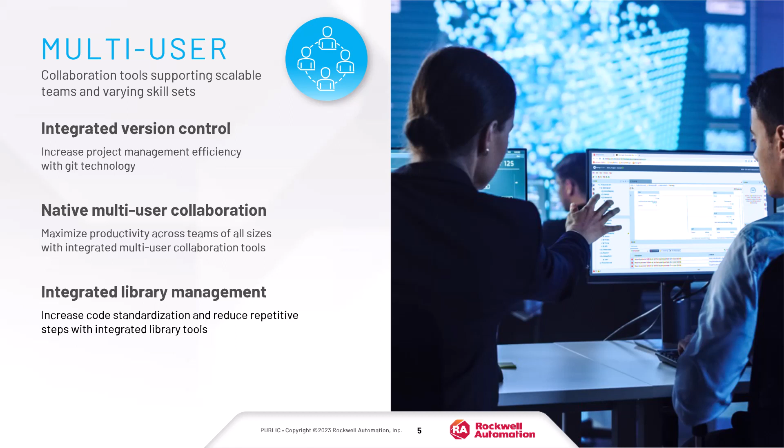With a system-focused approach, FactoryTalk Design Studio enables multiple controller management in a single project. Programs can be allocated individually to a controller based on the execution requirement of the project. This feature improves logical project organization and deployment. Rather than having to match the software version with a controller, FactoryTalk Design Studio can support multiple controller revisions and will inform the user when trying to allocate if the code is not supported by the firmware revision. This way we can use a single software across many hardware revisions.

Another benefit of FactoryTalk Design Studio, being a cloud-hosted SaaS offering, is the ability to provide updates automatically. FactoryTalk Design Studio has updates delivering new features quarterly. Since FactoryTalk Design Studio was released in October of 2022, there have been several updates. These updates include new features like adding FactoryTalk Vault integration, device management, and configuration enhancements, and enhancements made to the version control system.

For those who are familiar with Rockwell Automation's other design software, you may be asking where FactoryTalk Design Studio fits into that ecosystem. Rockwell Automation provides our users with an on-premises offering with Studio 5000 Logix Designer. For our Logix Designer users interested in moving to the cloud, we have FactoryTalk Twin Studio, which is cloud-hosted. FactoryTalk Design Studio is a cloud-native design application for users looking to adopt a cloud-native solution for their automation development.

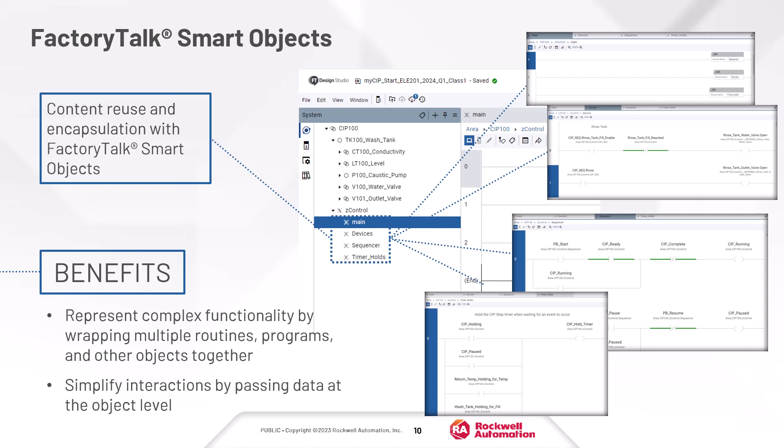To contrast, if you think about the reusability that's available in Logix Designer, now you're probably thinking about subroutines or add-on instructions or AOIs. Subroutines and AOIs also allow encapsulation, abstraction, and reusability, but you only have a single routine associated with those objects. Smart Objects expands on that idea and allows you to create larger encapsulated groups of code.

FactoryTalk Design Studio also allows for tags to be scoped at the routine level. So to summarize, Smart Objects allow modular, object-oriented programming to be used as your logical project design dictates.

Next, let's look at how FactoryTalk Design Studio is based on a logical, hardware-abstracted design methodology. We want you to be able to design your project based on what that system is doing and not be focused on where it is executing. We think there's a lot of value to designing your project logically. You will be able to deliver a project that is very easy to understand.

By looking at the system model, you are looking at what the system is doing and are able to troubleshoot the system that way. In addition to that, you can also build your project based off of what it's doing and worry about how it is executed later.

If you have created a Logix project before, then you have seen that you need to start by defining what controller you're working with. We have changed that workflow in FactoryTalk Design Studio. You are able to map out the system operation, create your logic, then add your controllers and hardware later. You will bind the logical content to the execution devices using a process called allocation. Let's step through that process of creating and allocating code.

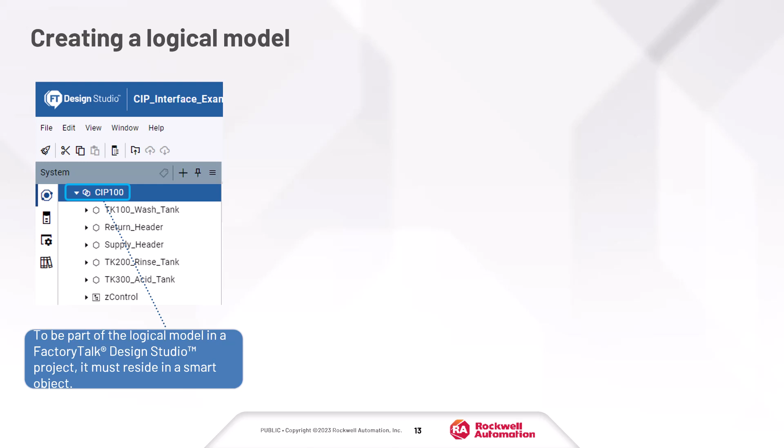We start in the system view where we create our smart objects. These smart objects represent the logical operation of the system. Our project is a clean-in-place system. CIP 100 represents our clean-in-place system, which has child smart objects. These child smart objects are for the wash, rinse, and acid tanks. CIP 100 is the highest level of our system.

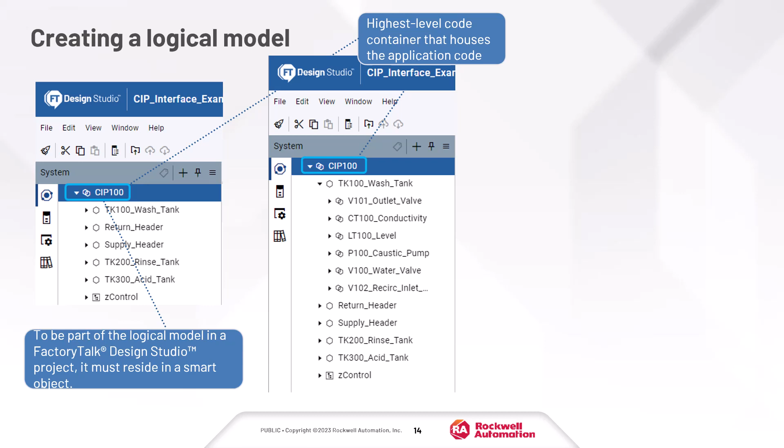If we expand out this smart object, we see the child smart object of TK 100 wash tank. This smart object has more child smart objects. The logical organization is what is important here. Imagine if we have an issue with the V101 outlet valve in the TK100 wash tank. We keep looking through the logical hierarchy until we get to the routine for the V101 outlet valve. The smart object allows for parent-child relationships in the logical model.

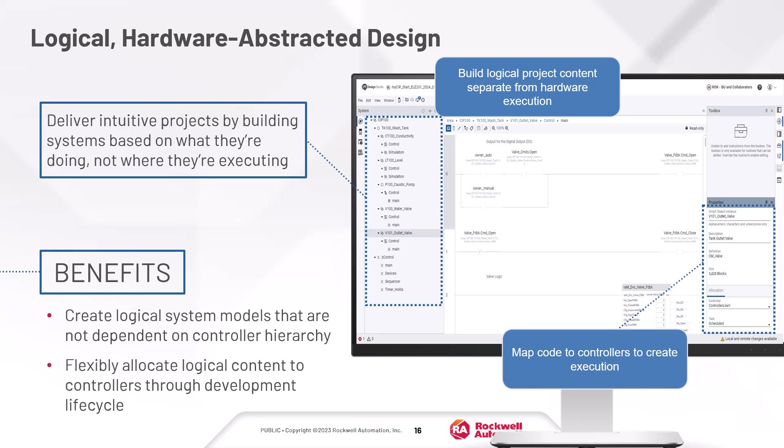The next topic I want to talk about is integrated libraries. When you think about object-oriented programming, you often need the ability to manage those objects in a library. That's what the idea of having an integrated library means. You don't need to go to a separate product to manage these definitions or instantiate them into your project. What you can do is create those definitions directly in the FactoryTalk Design Studio library.

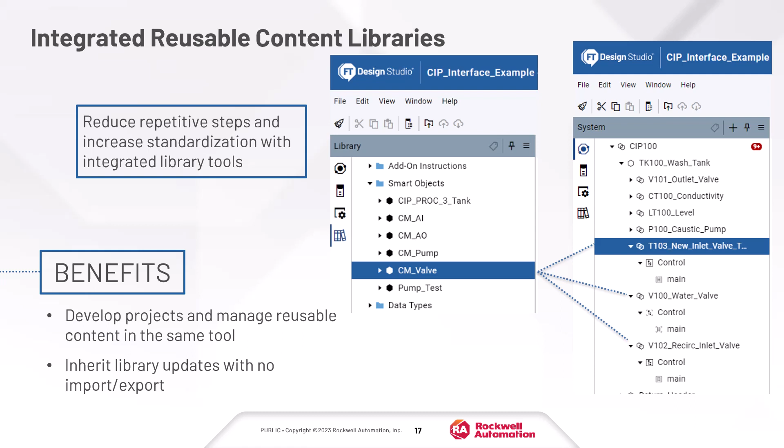You can see from the screenshots here that we still have AOIs and UDTs. Those are still available from the library, but the smart objects can now also be managed from the library. We will see how to instantiate smart objects in a few slides. But first, let's look at one other topic, how we share data between objects.

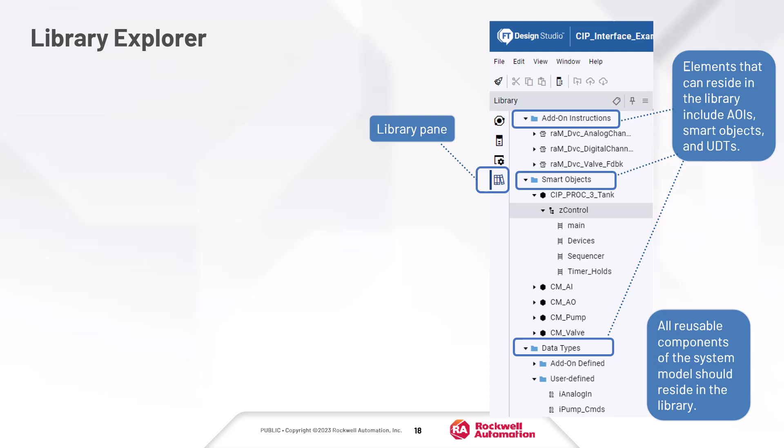Once again, when looking at object-oriented programming techniques, some key pillars are encapsulation and abstraction. To encapsulate and abstract your content in an object, you must provide a mechanism to share data outside of an object and also hide data inside the object. How this is done in FactoryTalk Design Studio is using parameters and local tags. Tags can be defined at both the controller and program level, but those defined at the program level can be designated as either local or shared.

Local tags are not visible outside of the program, where shared tags can be set as input, output, or in-out, which allows for connections to the smart object from external sources. These connections can be set in the property pane.

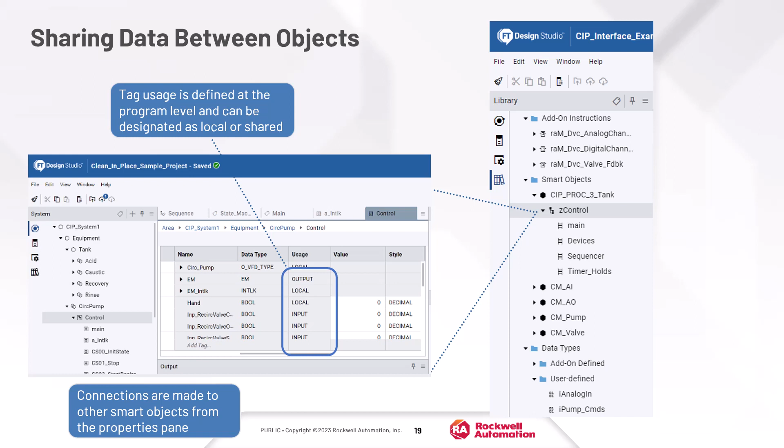Now that we have smart objects in our library, we need to be able to use them in our project. It's quite easy to instantiate a smart object into your project. In the system view, as seen on the left side of the slide, the user creates a new smart object. The Smart Object dialog box appears, and after the name is entered, the user can select Create an Instance from

a definition. Once the definition is selected and the smart object created, it will be placed in the project in the system view. Notice how the smart object icon is two linked hexagons to indicate it is linked to a smart object in the library.

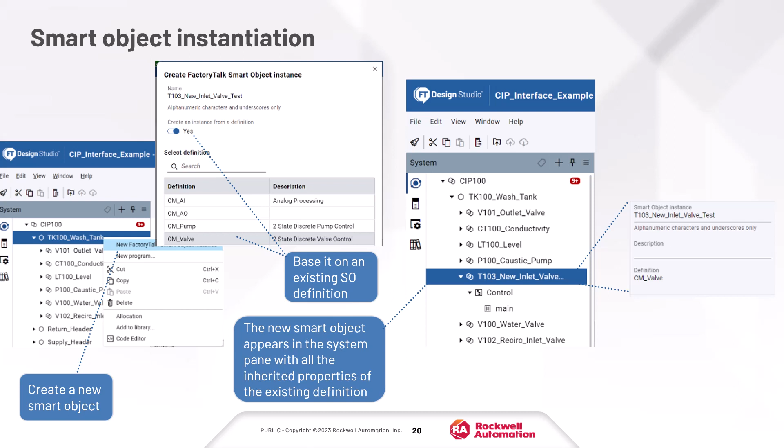This is a good time to take a quick look at instantiated versus singleton smart objects. A singleton smart object is a standalone object that acts as a hierarchical container in the system view. A singleton is identified by the icon of an outline of a hexagon. When a smart object is defined in the library, it is shown as an icon with a filled-in hexagon. When a smart object is inherited from a library object, the smart object's icon is two linked hexagons.

I know you may be saying, do I really need to know this much detail? The next slides will answer that question.

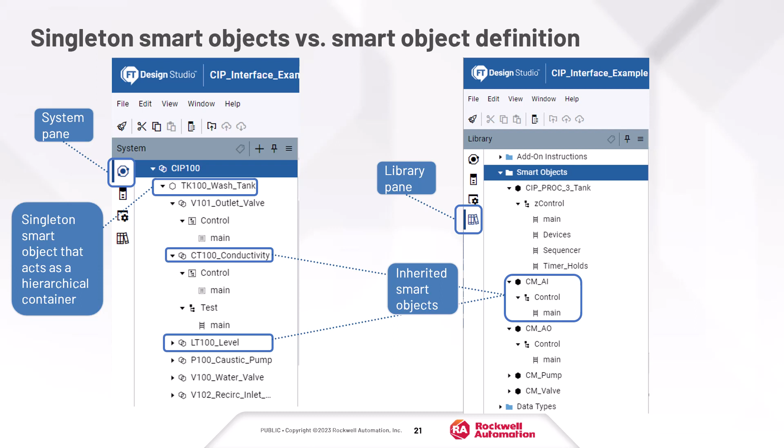Another key aspect of object-oriented programming is inheritance. All this talk about instantiating and inheriting smart objects is necessary to implement inheritance in FactoryTalk Design Studio. An important part of inheritance is being able to break inheritance. Imagine in your project you have an object which is inherited from a library. In this example, we have a valve object.

Let's imagine that we need to make a change to that instantiated smart object, but we don't want to change the definition. That would change all the objects using that library module. Instead, we break inheritance. In this case, we right-click on the object and choose Override Program. This allows us to change the specific program without affecting the library definition.

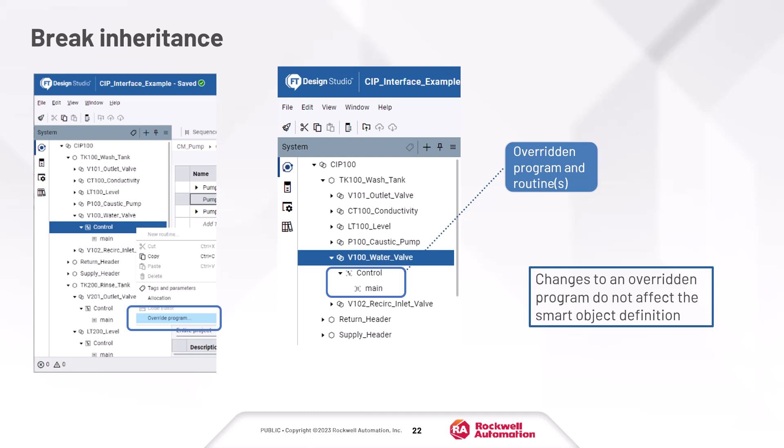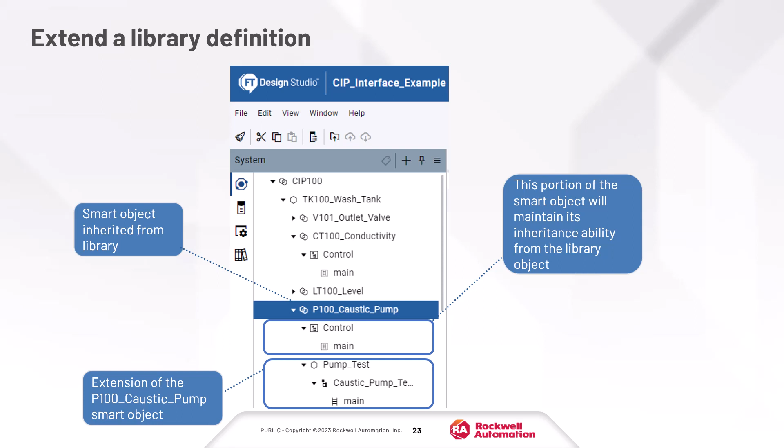Another important aspect of inheritance is combining objects together to create new objects. You might want to combine multiple objects together or add content to a current object. In this case, the original library object does not change. This process is called extending an object, and that is also supported in FactoryTalk Design Studio. In this example, the pump object is used from the library, but the pump test smart object is added to the caustic pump smart object.

Now imagine we take the code we just created and we want to create a library object from that. Guess what? We can. If we right-click on the smart object and select Add to Library, we can add this new code back into the library. Better yet, we still have the original definition as part of our new smart object, so if changes are made to the library, those changes will be inherited in the new object. That is object-oriented programming at work.

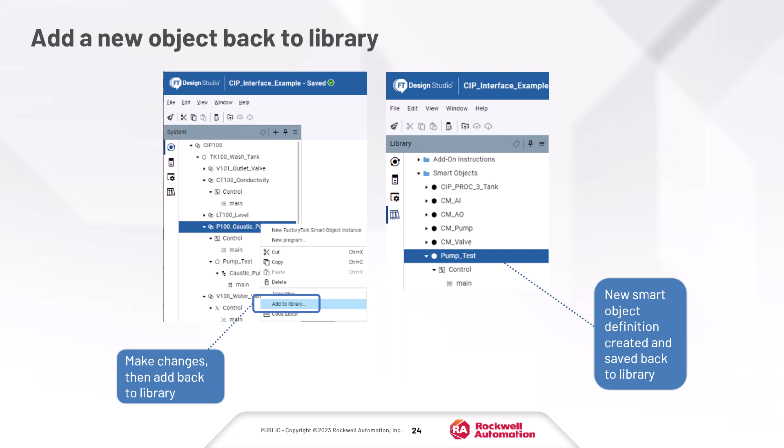We have gone over a lot of items here, so let's take a moment to recap all we have learned. Smart objects are setting the foundation for the modern software experience in FactoryTalk Design Studio. They provide the basis for a modular, scalable design environment. They can be standalone or inherited from the library. They expand on the idea of the AOI but can encapsulate other smart objects as well as multiple programs and routines. Smart objects allow you to create a logical hierarchy that's easily understandable.

They can be created in the integrated library so they are easily transported and instantiated. They can be extended to account for differences in the project design. They can interact with other smart objects by passing data in and out through a program parameter connection. They continue to be expanded on through future iterations of the product. Finally, the integrated library currently supports one project but will be expanded in future updates to be shared among many FTDS projects, users, and organizations.

As we mentioned earlier, many programmers working on automation are more comfortable with text-based programming. FactoryTalk Design Studio allows those users who are familiar with text-based programming to easily transition to automation programming, which has been traditionally done with graphical editors. And for those who prefer the graphical displays, those are still the default. When making changes in the code editor, the text is automatically rendered in the graphical display. This feature provides the flexibility for each developer to choose what programming method is best for them.

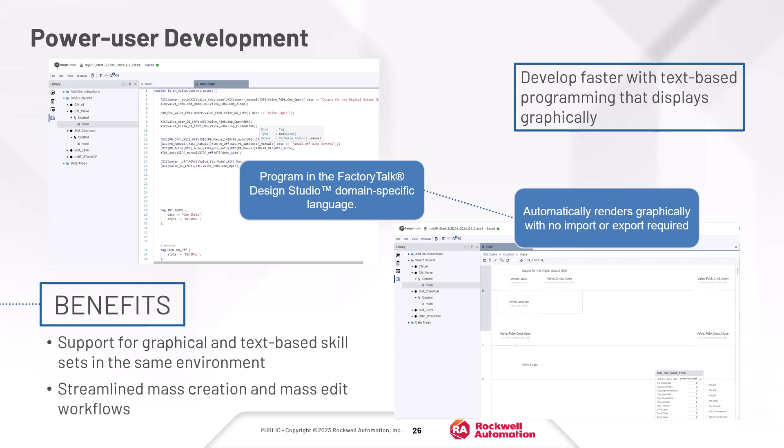As mentioned earlier, Integrated Version Control System allows native multi-user collaboration, allowing the user to easily share code while maintaining code synchronization.

If you're not familiar with the idea of a commit, it is a milestone in your project. It is a known good state. The commit allows an increment in the change history to see who's making changes and what they're doing to the project. It also allows detailed comparisons.

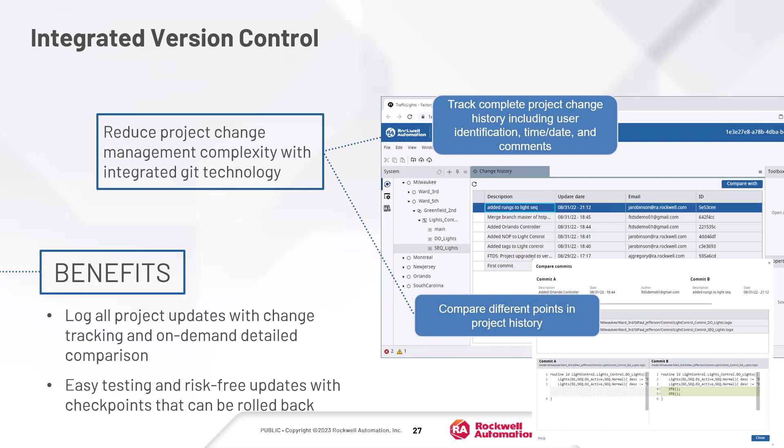You can see in the lower right the comparisons of one point in history to another point in history. I can take my latest changes and compare them to several changes ago. Maybe that's part of a troubleshooting effort, or maybe I'm just looking to make sure that I understand the changes that have occurred at a certain point in time. Currently, the comparison is in the text editor, but in future releases a graphical compare will also be available.

To look a little closer at the change comparison, highlighted content calls out a change in the line of code. Gray slashes indicate nothing was in the project before and now there is something in the new version. Any highlighted line indicates something has changed.

Going hand in hand with version control is the topic of multi-user collaboration. This integrated version control system enables native multi-user collaboration, allowing the user to easily share code while maintaining code synchronization. As we just covered, FactoryTalk Design Studio also includes integrated project tracking, allowing users to see all local and remote changes by other members of the team. You can merge your local edits with the shared project and merge changes made by other users. This feature provides design flexibility and improved collaboration while developing applications.

For those who are familiar with Git, the ability to have multiple users collaborating on a single project is not new, but we recognize Git is oftentimes a new concept for automation users. So we are trying to make it simple for those users. We have added icons highlighted at the top, where with a single click you can merge, push, and pull changes, or bring up the current change history. In the bottom right-hand side of the screen, a statement of the status changes is displayed. This indication helps the user to understand what project changes are available in the system.

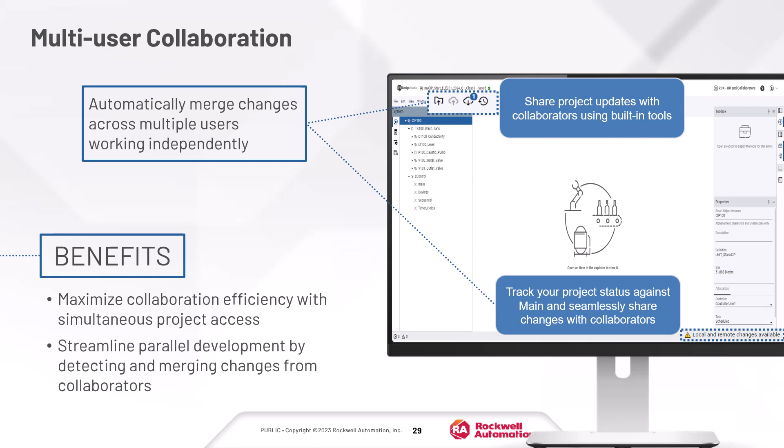I thought it might be a good time to provide a brief overview of the differences between the shared and local changes that could happen in a cloud system. All developers have simultaneous access to the shared project, which is shown in the cloud server. When a user makes changes in their local repository, that change is still in the cloud, but not yet merged with the shared project. When a user makes a change, they will first make a commit, which is a point which adds a line to the revision history. You have the ability to revert back to a previous commit point if necessary.

If changes have been made by a remote user, a pull will merge those changes into your local copy of the project. Conversely, if you make changes and want others to have access to them, you will need to push your changes to the shared project. At any given time, you can view the change history and see the status of the shared project.

Being as version control and Git are somewhat new concepts in automation programming, FactoryTalk Design Studio provides cues as to the status of the project. The icons in the toolbar indicate when you make changes that a commit or push are available, or if changes were made by a remote user, an indication that a pull is available will be displayed. A status message is always present in the bottom right of the editor window.

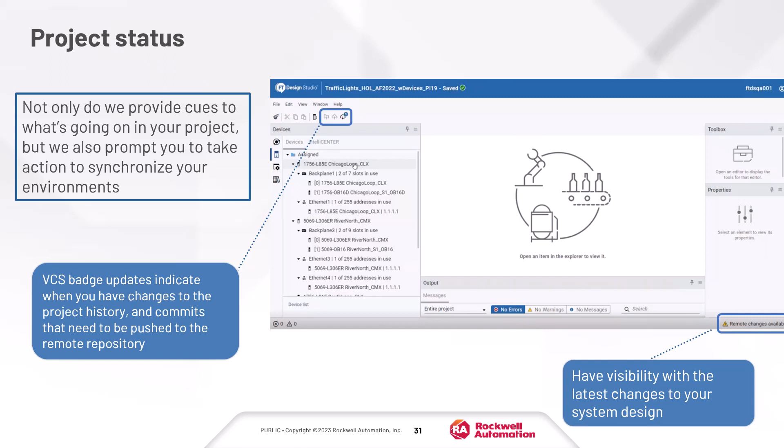As mentioned earlier, with a system-focused approach, FactoryTalk Design Studio enables multiple controller management in a single project. We recognize that the complexity of the systems you are building is always growing. Having a project based on its logical operation rather than its execution drives managing everything in a single project file. We also know that every controller in a project may not all have the same controller firmware. So having all of these controllers in a single place means that we also need to make sure you can connect to that firmware regardless of the software version.

Earlier, when I was talking through the idea that we would always have the software up to date, you might have been wondering about the firmware. The answer is that starting in version 34, FactoryTalk Design Studio will be able to manage all the firmware versions for you. If you try to allocate functionality that is not supported in a controller firmware, a validation message will be generated.

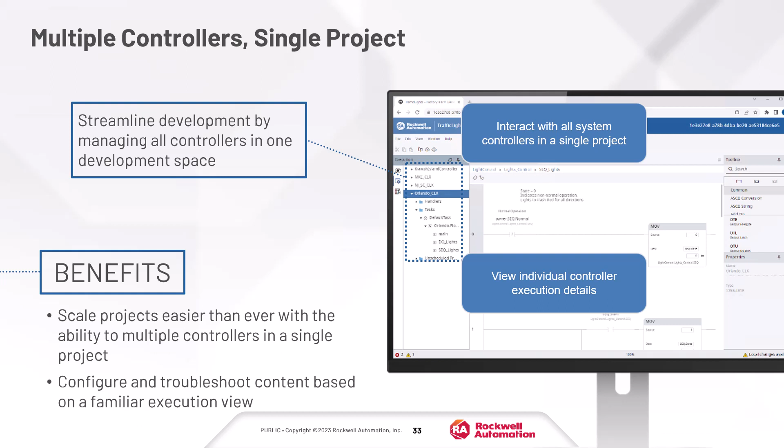The other issue with multiple controllers is how to allocate your programs for the controller. Each program can be allocated individually. So if you need to expand your project to include more controllers, no problem. Allowing for control over how programs are allocated to the physical controllers improves logical project organization and optimizes deployment.

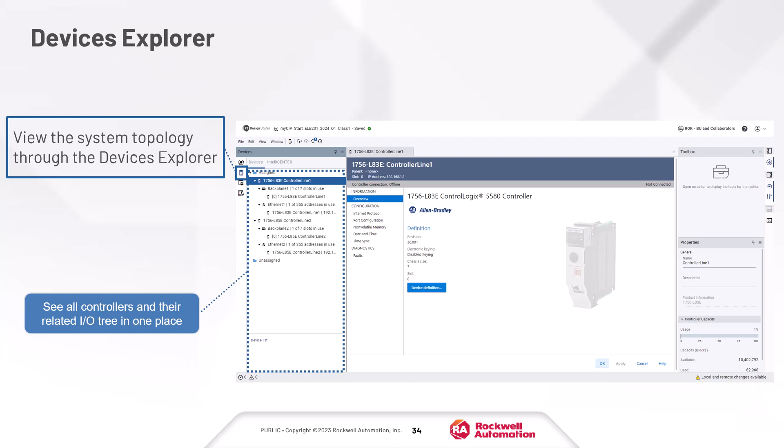Another benefit of FactoryTalk Design Studio being a cloud-native application is that all these device profiles are accessed directly from your web browser. As new profiles are available or updated, they are immediately available without updates or downloads.

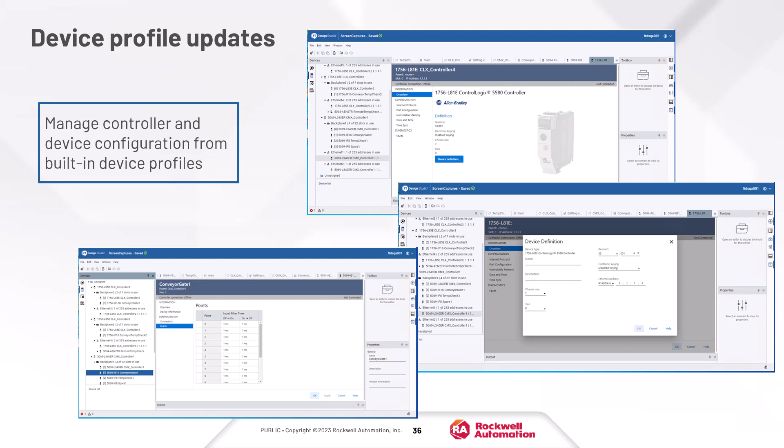There is a new concept in FactoryTalk Design Studio that may not be familiar if you're coming from Logix Designer, and that's the concept of unassigned devices. Whenever you add devices into Logix Designer right now, you either install the module into the backplane or you add them as an Ethernet device. In Design Studio, we focus on the logical design of the system, which means we provide flexibility with how you will manage your physical devices.

You know you will need an output module and an input module, but you might not know which controller owns which modules. Or it may be possible you don't want to choose a controller until you know the size of your project. In FactoryTalk Design Studio, we give you the ability to add devices to the project without having to assign their ownership. This ability is called an unassigned device. Having the devices unassigned allows you to move the device without losing all of the configuration of that module.

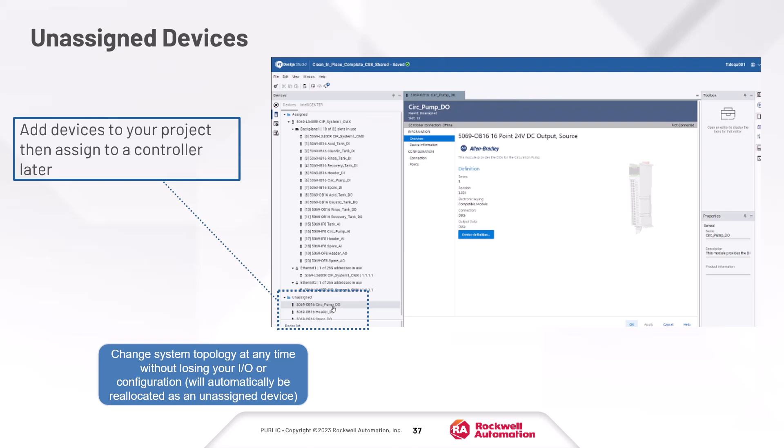The last part of the Device Explorer I want to mention is the device list. If you're looking at this Explorer over on the left, or if you're familiar with the larger ACD project, it can be difficult to manage a long list of devices. If you have a controller that has a large number of I/O modules, that list is going to get pretty big, and it will be hard to maintain.

In FactoryTalk Design Studio, we are introducing the idea of the device list, which is exactly what it sounds like. It's just a flat list of all the devices that are in your project. But instead of being in that tree form, which might be a little bit hard to navigate, you can see it's a flat list shown here on the right.

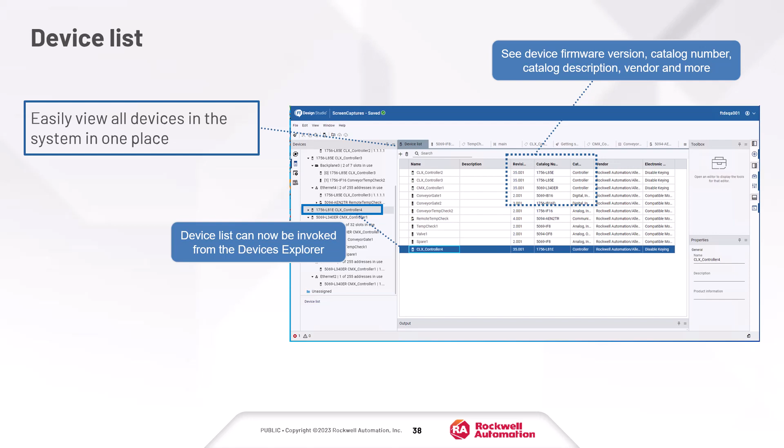The list gives you the name, descriptions, catalog numbers, firmware revisions, category type, vendor, and electronic keying setting. This list can be sorted by any of these columns, which allows you to view the information as it is important to you. Alright, so now we have looked at a high level of the features of FactoryTalk Design Studio.